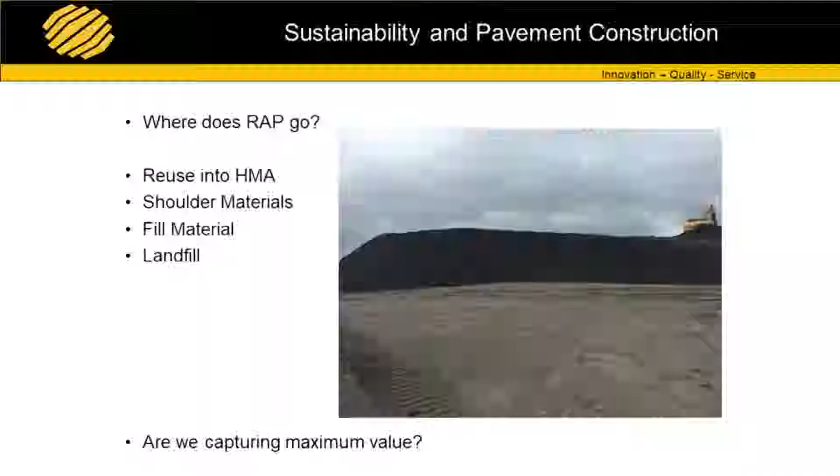Let's talk about RAP. Where does reclaimed asphalt pavement go? I live in Indianapolis, heavily urban area. We have RAP piles all over the place. The RAP pile's so big, they put a little reclaimer on top to help crush them down, and it looks very, very small from the roadway. We reuse it in hot mix asphalt. Tried and true method. We see contractors that use it as shoulder aggregate. Maybe even worse, they use it as fill material. And the last thing we want to do when we talk about retiring RAP, put it in a landfill, right? Because we're just occupying space. Let's talk about, are we capturing the maximum value of that material?

So I'm going to talk about the cold recycling processes today. There are full depth reclamation, cold in place recycling, and cold central plant recycling. My colleagues from ARRA are going to be talking about the 4th recycling technology after me, which is hot in place recycling. But at the end of the day, I want us to keep in mind with these technologies, we're building roadways, we're using less resources with proven construction methods. These are engineering processes, engineered equipment, engineered designs with engineered technology.

And ultimately, and this is a clip from Road Resource, which Rex is going to talk about later, as pavement managers and pavement designers, we want to increase that overall network condition, right? We want to keep those PSI values high, PCI values high. And we want to do it for the lowest cost, keeping a green aspect in mind, the eco-benefit, if you will.

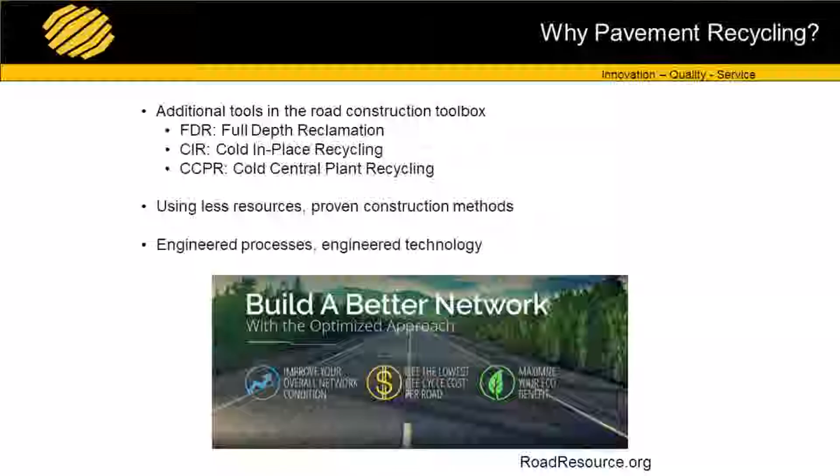So here's a little snapshot of what the 3 processes are, and really quick, do our agencies have any experience with full depth reclamation in here? A couple hands up. So it's the deepest treatment. We're going to get through all the asphalt pavement. We're going to incorporate some of the aggregate base or subgrade depending on the needs of the road. We're going to use a bituminous stabilizer, a foamed, or an asphalt emulsion, or if we're getting a lot of subgrade in that mix, we're going to use a Portland cement stabilizer.

So FDR, if you want to picture where would I use this tool, this is an alternate to complete reconstruction, remove and replace. This is where we can grind the roadway back to an aggregate granular layer, and we're going to stabilize that for a homogeneous base.

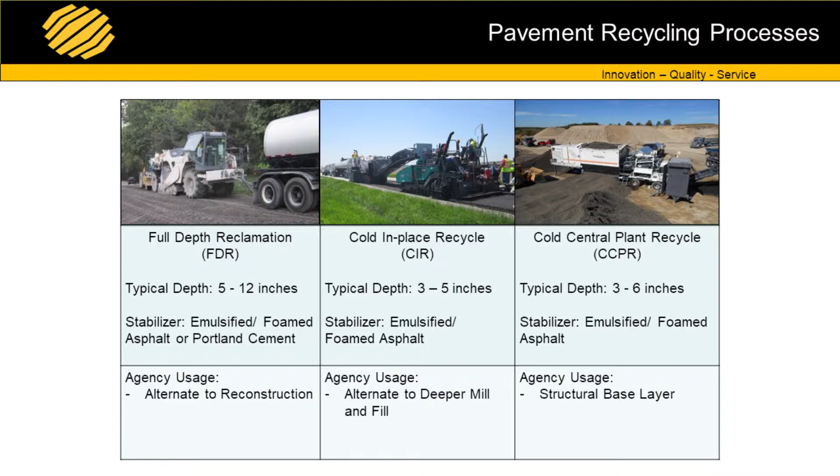Cold in place recycle is the 2nd treatment. Typically, we're looking at 3 to 5 inches in processing depth. That milling machine goes down the road, just like a regular milling machine. But instead of putting it in a truck and hauling away, we're going to add a stabilizer in-house, and we're going to throw it right back in a paver and lay it in place.

So an agency might use CIR as an alternate to a deeper mill and fill type treatment, where you have to get into the pavement a little bit deeper. Cold central plant recycling is where we're taking that RAP to a nearby location, close to the job site. We're going to put it through a pug mill. We're going to add a stabilizer to it, truck it back, and we're going to use that as a structural base layer. So those are the three cold recycling technologies where we can reuse the existing pavement, we can reuse existing RAP, and build very good performing pavements.

Just in general, keys for successful recycle projects, it comes back to right road, right time, right treatment. And a lot of it's with process selection, and we could stand up here all day and talk about process selection. It is an engineered process, so to ensure good projects, you've got to understand the scoping up front, identify the distresses, where they're coming from. You've got to do proper pavement design, understand your stabilizers and mix designs, and perform quality control.

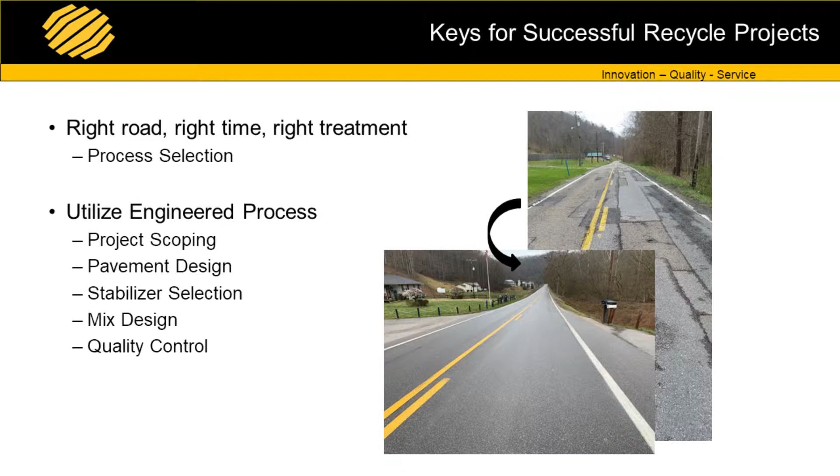So you can take a road like that, perform a CIR, cap it with an HMA overlay, and get performance that looks like that after years. So let's just keep that in mind as you design these projects and build these types of projects, that there's a lot of work that goes up front, before scoping, during construction, and afterwards to make sure that they perform well. So here's a little schematic just to keep in mind what the CIR process does.

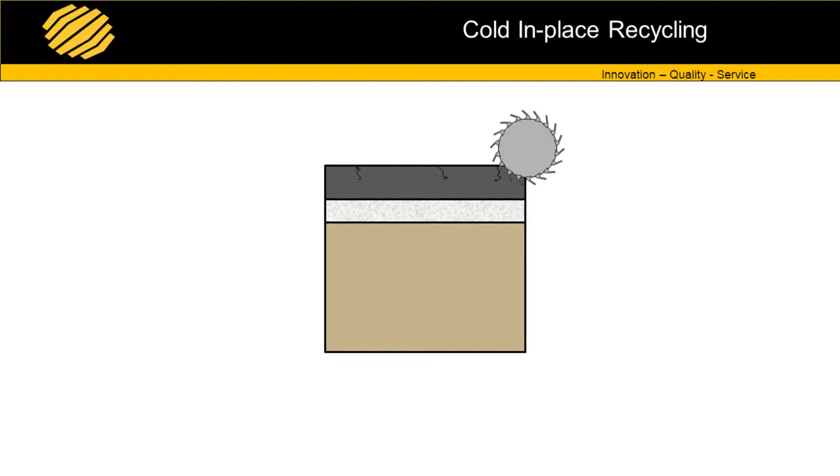So let's say that we have cracking in the top 3 to 5 inches. That milling machine's gonna go through, grind it up, lay it back in place. We can lay it back in place on existing HMA where we don't have any bottom-up cracking, where it still has some remaining life in the bottom layers of that pavement. So we're gonna address a lot of the top-down issues. Depending on the pavement, we can go all the way to the aggregate base if we need to.

So here's a little video of what the CIR operation looks like. This is a project in southeast Michigan that I had the opportunity to be a part of. So this is what the train looks like. First up, we have a water tanker. It's plumbed to the machine. We're gonna add a little bit of water into the cold recycling process to help with the mixing of the emulsion and the RAP. It's gonna push an emulsion tanker. That emulsion tanker is delivering about 2.5% emulsion to the RAP during the process.

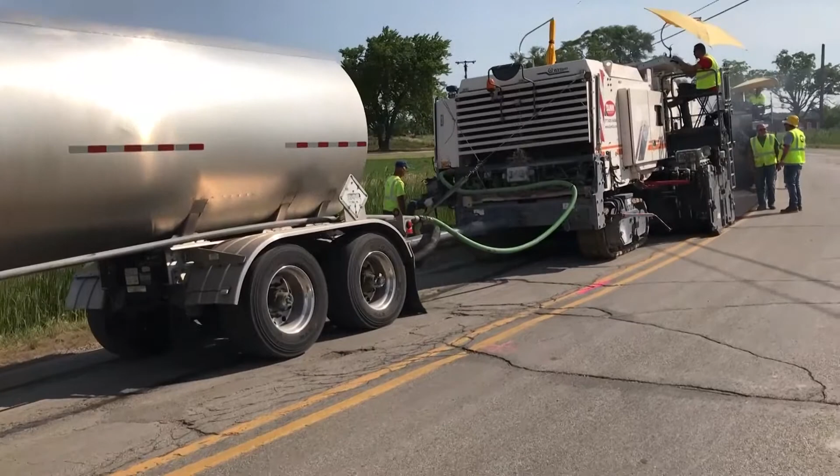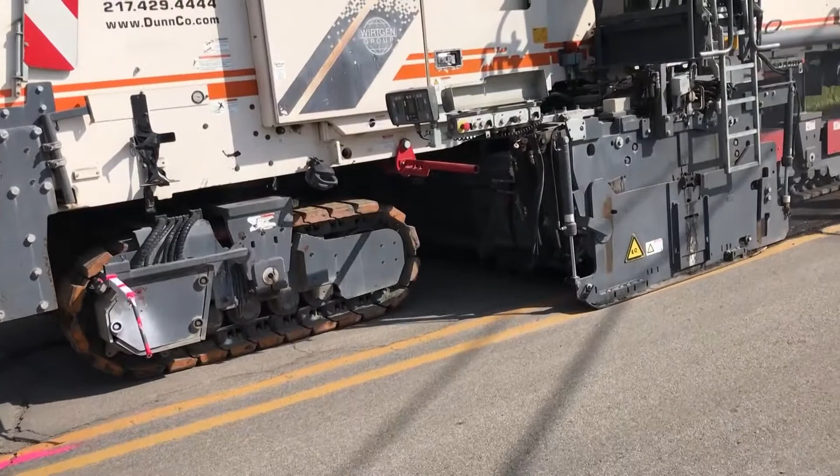And it all goes into that machine, which is engineered to control the rate of both the water and the stabilizer that goes into the RAP based on the speed and the cut depth of that material. You can kind of see the pavement here, kind of the cracks that we have. This is a composite type pavement. The machine cuts 12.5 foot wide, so it cuts a full lane width. Kind of see that milling machine's going down and grabbing all that asphalt. We're gonna take all that asphalt, we're gonna eliminate those cracks. We're almost down all the way to the bare concrete.

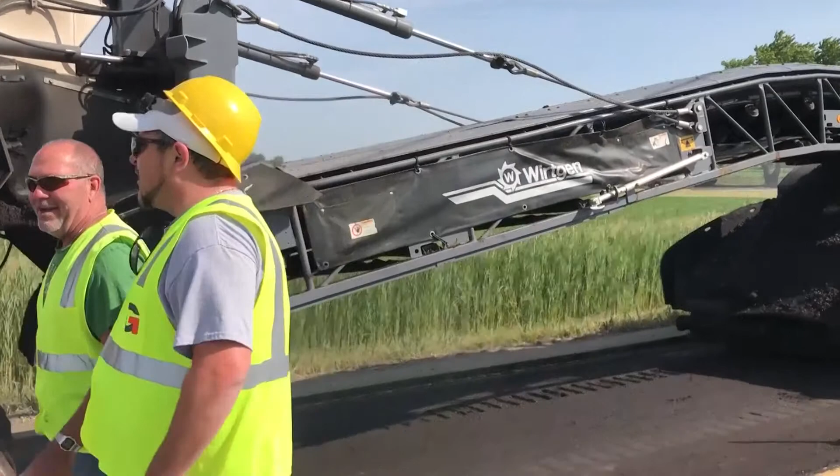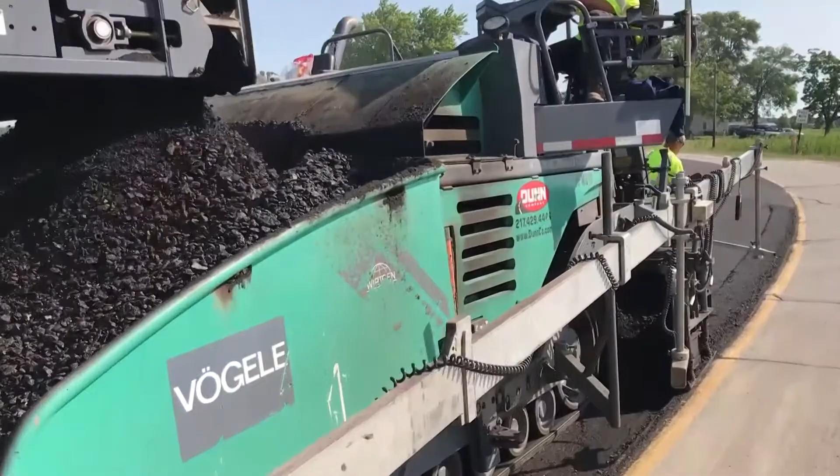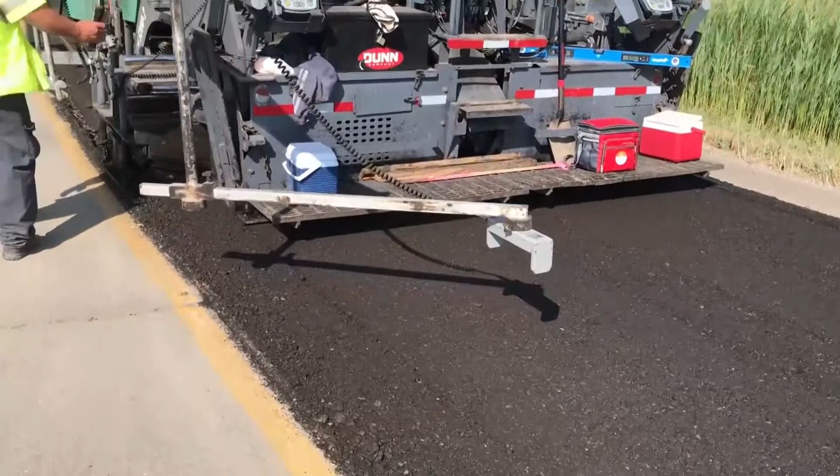That RAP then goes straight into the hopper of the paver and then gets laid right back in place. Relatively homogeneous mixture coming out, and then it's going to get compacted down the roadway. You can kind of see a little bit of what that looks like as it gets seated. So after it gets compacted, we're going to leave that CIR open to traffic because it has enough strength to put traffic on it. We're going to let it breathe and we're going to let it cure out a little bit. We're going to let some of that moisture get out, and then we're going to cap it with some sort of surfacing layer.

What don't you see in this process? Well, the milling machine's a little bit of special equipment. You don't see heat, so there's less energy. You don't see trucks. So the other alternative to fix that roadway would be to mill those 4.5 inches of asphalt up, load it in a truck, take it off to the nearest site, bring back brand new asphalt, right? So there's that green benefit of the trucking, right? Because they consume fuel. They release gases in the environment as they work. But let's just think from a safety standpoint, too. There's a lot less truck traffic in and around that roadway for the other traveling public. So let's keep that in mind, too, when we're talking about sustainability of some of these recycling type treatments.

Let's talk a little bit about how they perform. And I'm going to talk about a project that we had the opportunity to be a part of here in West Virginia. This was a CIR project constructed in 2015. And I think a lot of folks have this idea where a lot of these recycle type treatments, they're only good for lower volume roadways, low speed roadways, right? We got to understand these treatments so that they get applied to low volume roadways, but we got to also apply them to some of these high volume roadways, high speed roadways.

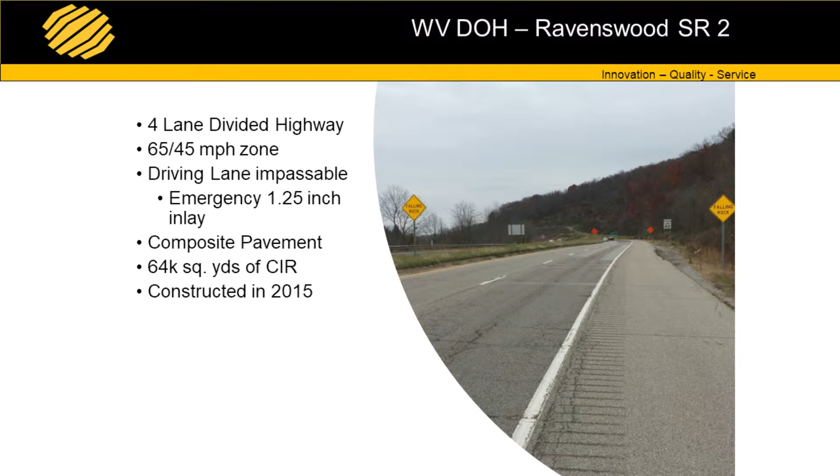And this stretch of State Route 2 near Ravenswood, this is a 4-lane divided highway. There's a lot of trucks, there's a lot of traffic, there's a lot of speed. The pavement, even before the project started, was in such dire condition that there was actually an emergency inlay before the project even started on that driving lane. It was a composite pavement, so there's some concrete laying underneath all that asphalt. Ultimately, it was a 64,000 square yard CIR project. And again, as I mentioned, it was built in 2015.

So let's take a look at what that pavement looked like. What do you guys see here? A lot of cracks, right? From what? Composite pavements crack funny because the joints reflect through, and a lot of times as those come up through, the other parts tend to crack around with it. Travis, you mentioned some environmental cracking. What do you think that ride's like for our traveling public? You're bouncing up and down. Travis, that data before the CIR was about an IRI of 140, 150, in that range. So that's what that pavement kind of rode like for our public, our social impact, if you will.

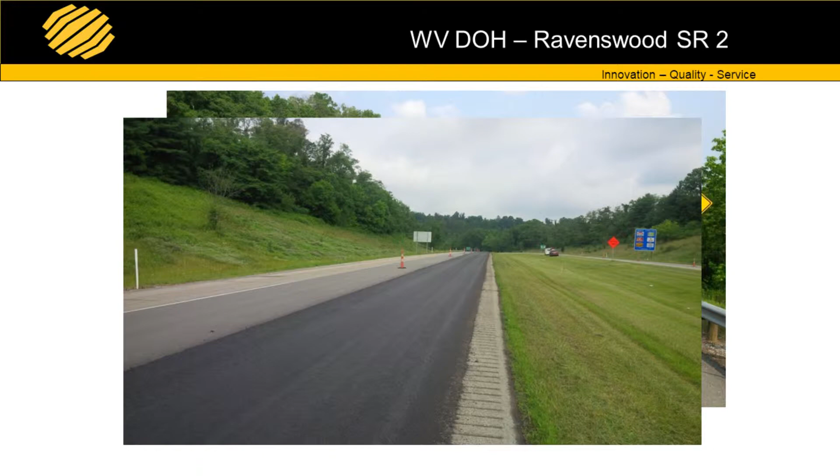So here's some shots of the construction. This was an emulsion project, and on this one, we actually added a percent of cement in the formulation to help set it up. We were cognizant of the fact that we were going to have some traffic on it early, particularly in some of these intersections. When we're done compacting these mixtures, we like to put traffic on them. Well, what happens when it's slow-moving, turning truck traffic? What do those wheels like to do to mix, right? Think of the forces. It's a shear force, right? And if that mix isn't set up, and if it's not hard enough, and it doesn't have cohesive strength, what are we going to expect that mix to do? It's going to tear and shove and push and scoot all over the place, right?

Well, after a few rotations of trucks going through, you can kind of see the tire marks, and you can kind of see where maybe it's picking up the loose ends of that mix next to that adjacent lane. But ultimately, you can see that mix didn't shove, push, tear, or anything like that. So as agencies try to understand and use these new technologies, you got to be cognizant of how do I optimize the performance of that mix to get the expectations that I want during construction, understanding that we're going to expect to have traffic on it relatively quick. So, performance.

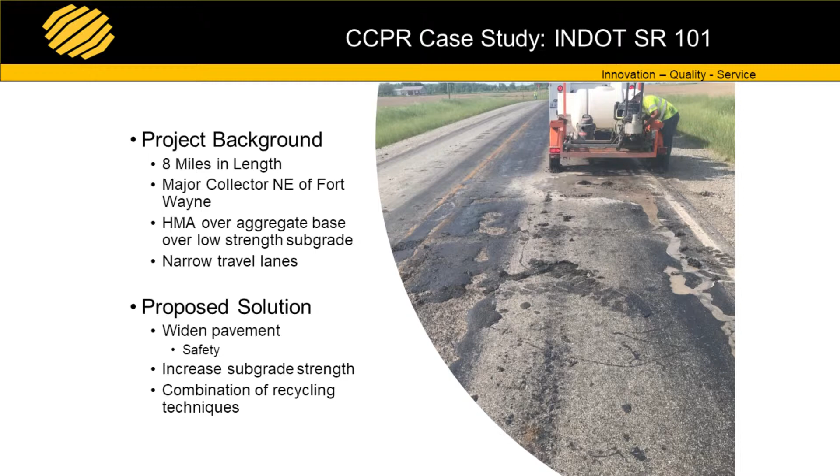So the idea was, how do we widen this pavement to enhance safety? We need to increase the subgrade strength so we have a good solid foundation. They ended up employing a combination of recycling techniques. So here's a shot of the roadway. They had asphalt 20 feet in width. And what they elected to do, and this was the first time they tried these processes together, they took 8 inches of that existing asphalt off the top.

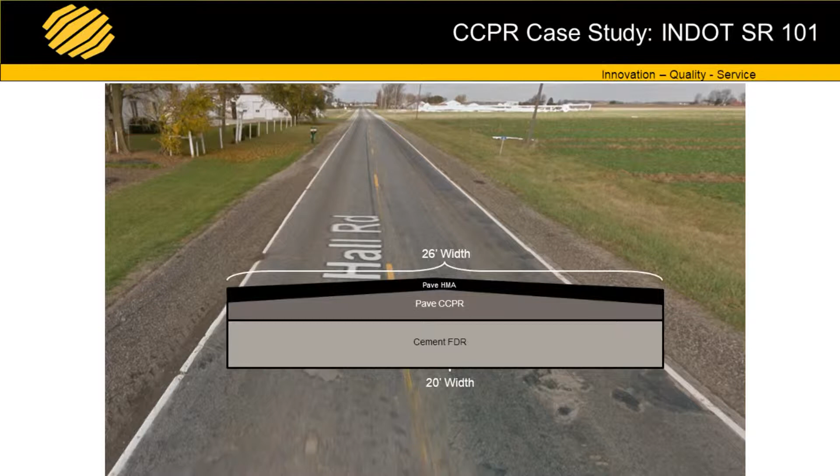They took the remaining aggregate base, subgrade, and shoulder material, and performed a 26-foot wide cement FDR. So they're going to build that foundation. They took that stockpile that was only 10 miles down the road, instead of 25 miles to the nearest hot mix plant, and they paved it back in a single 6-inch lift as a cold central plant layer, and then they capped it off with 2 inches of hot mix asphalt.

The general contractor on the project was Brooks Construction, and Brooks put together a really nice video that's available on YouTube. So I wanted to share that with everyone here today, because it really helps demonstrate how the process works. So there's an idea of what the roadway was like. A lot of truck traffic, pretty narrow lanes.

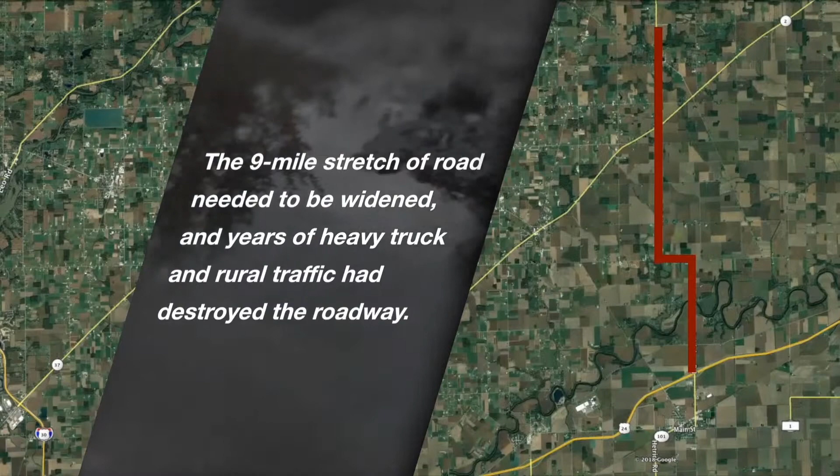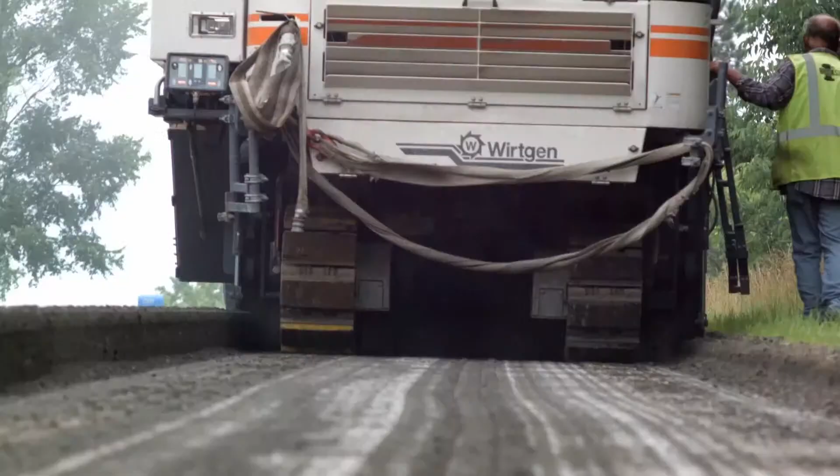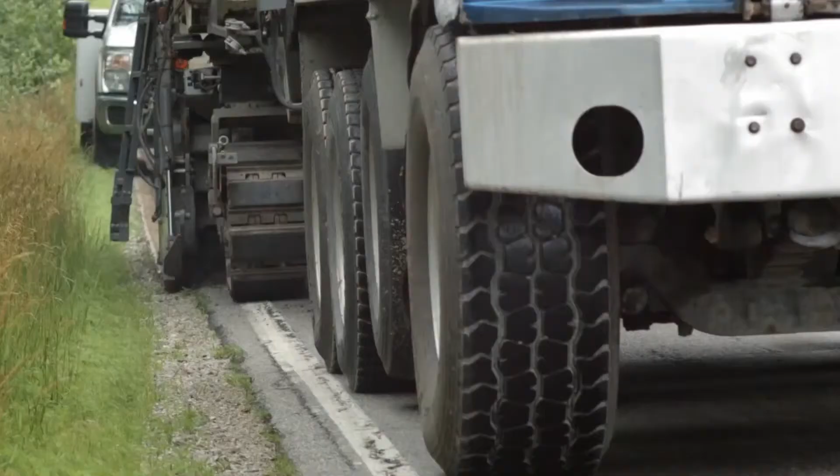And they ask the question, as they start showing the milling, how many tons of RAP do we take off the pavement each year? And what do we do with it? And I would have to say that Brooks, who's a pretty heavy hot mix contractor in that area, was great to work with in understanding this new process. As I said, this was INDOT's first CCPR job, and they picked a 9-mile stretch to do it, so it was quite the demo type job.

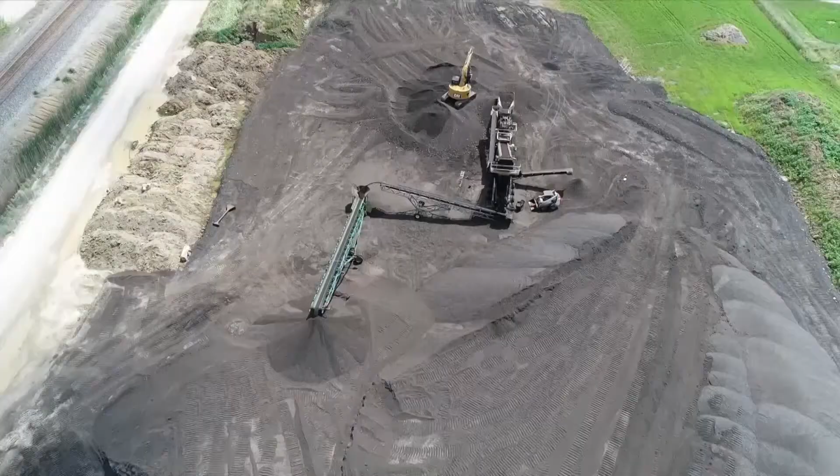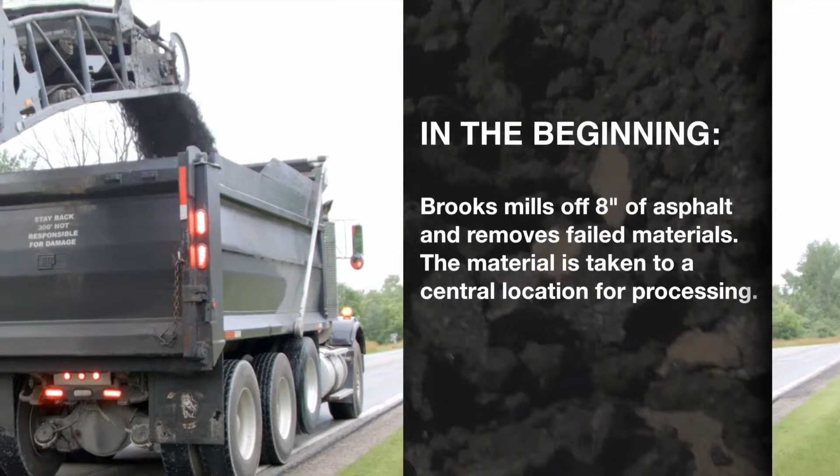That's what 9 miles of RAP looks like in a nearby location. So they take the 8 inches of asphalt off, take it back to the plant, and do what we call processing. Processing entails crushing and screening that RAP down to 1.5 inches, 1.25 inches minus, so that we get continuously graded material.

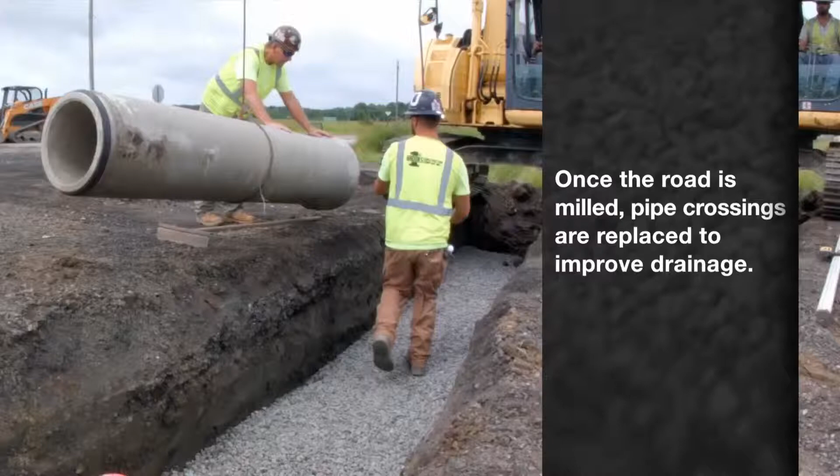They were able to do some pipe work, some pipe crossings to enhance drainage, and they were able to build that platform for the cement type FDR. So we're going to create that stable platform to put our flexible pavement on top of.

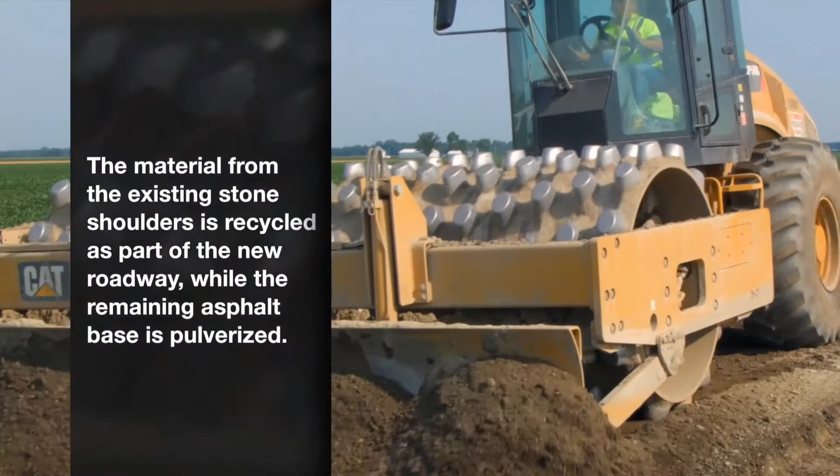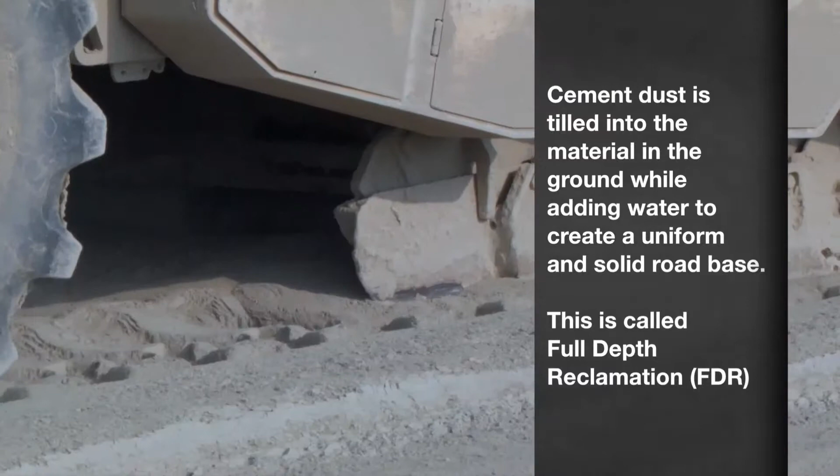So how much material did they import to do that foundation stabilization? They just brought in the cement, right? So 5% of that 10 inches was new material brought in.

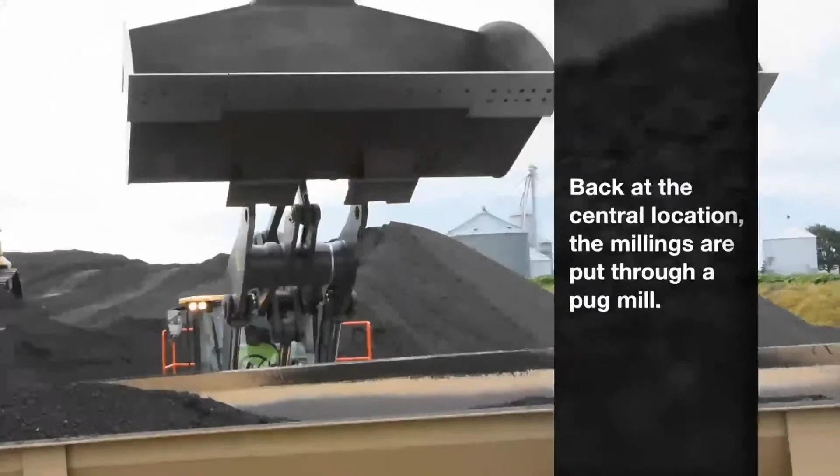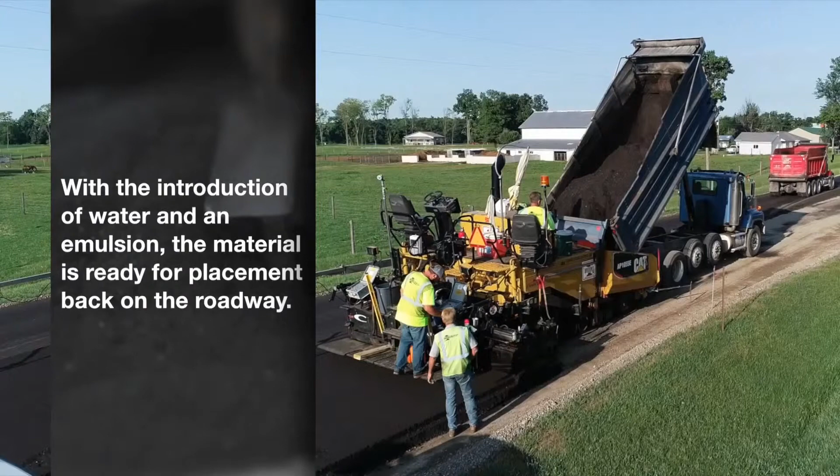Here's a shot of the pug mill, what it looks like. That pug mill was making 300 tons per hour. And across 17 days, that little pug mill made 37,000 tons of mix and supplied it to this job. And I mentioned that pug mill was only 10 miles from the job versus the 25 miles compared to the nearest hot mix plant.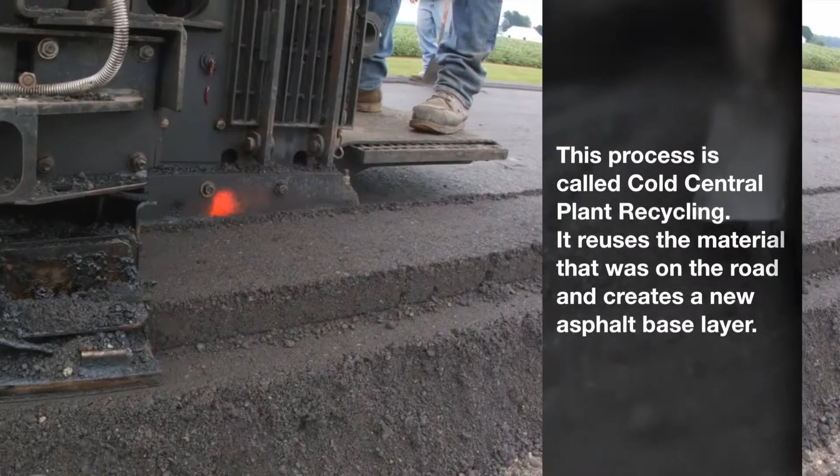You know, how many trucks do we have for 37,000 tons of mix? It's a lot of truckloads, right? Multiply that by 15 miles back and forth. Saved a lot of money on trucking as well.

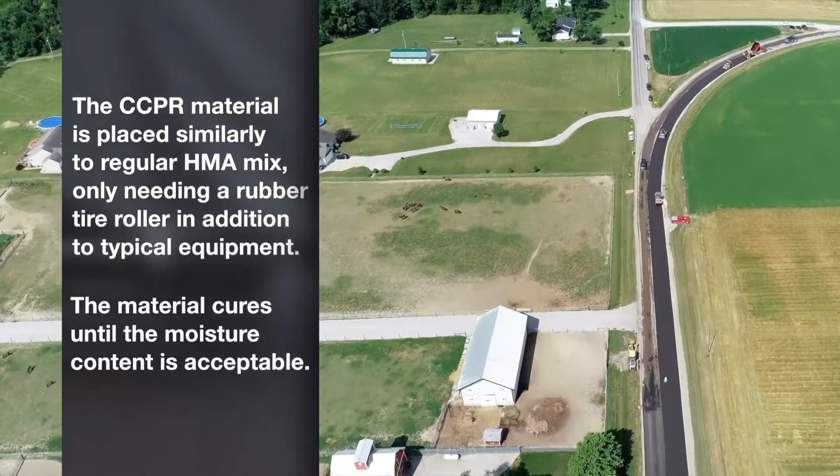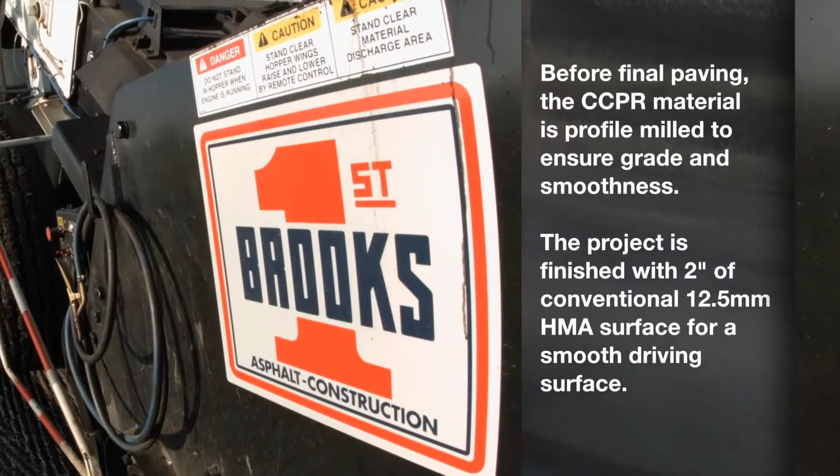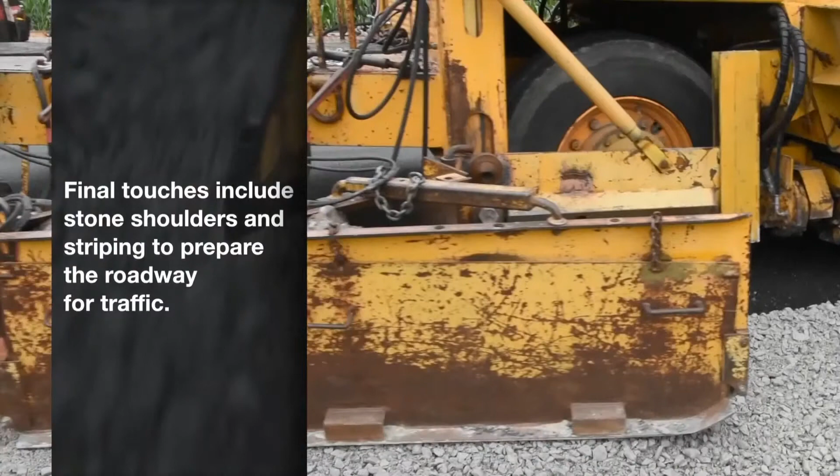Went ahead and put a 2-inch asphalt layer on top of it. We actually profile milled the central plant afterwards to help with ride and cross slope, which is one thing that we're doing in Indiana with our recycles to help with ride, and it also helps with bonding. Those striations from the milling help create a little bit better of a shear plane for the surface and the underlying layer. And ultimately, brand new roadway.

Let's do some math. Talk about sustainability, talk about reuse. 10 inches of that base subgrade, 95% of that was already there. We brought in 5% of the cement. The cold central plant mix, 6 inches thick, approximately 37,000 tons. We used 2.5% emulsion. Cold treatment, we didn't even have to heat it up. We didn't have to use as much energy during production. So that layer was 97.5% recycled materials.

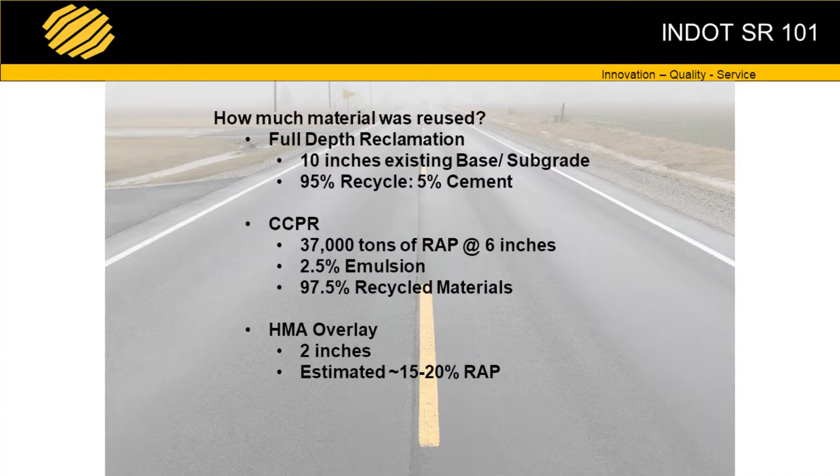Then if we consider the HMA overlay at 2 inches, which I would assume probably had 15 to 20% RAP in it, that pavement rebuilt 18 inches thick definitely had over 90% recycled material in it. So the question is, well, what did it cost? And some of the statistics I've heard is that central plant layer is probably 30% more cost effective than traditional methods. So across 9 miles, 37,000 tons, the department saved a good amount of money on that project.

So there's a lot of other resources and tools out there to gain a lot more information about how these things work. Project 9-62, NCHRP project that VTRC is working on with others, they're helping find new quality control methods so that we're actually improving the engineering process of how these are constructed in the field. I know NCAT has test sections out on US 280, looking at central plant, CIR type layers and how they're performing over time.

Where's our Virginia guy? Everybody's watching you guys too. You guys are doing interesting things there. So the same thing we did on 101 with a cement FDR and a cold central plant layer, our friends in Virginia are doing the same thing on interstates, on added travel lanes. Everybody's interested to see how those projects come together. The data that Brian Diefendorfer is sharing on the first job is showing that these layers are performing extremely well.

So other tools that exist, roadresource.org. Rec's going to talk about it a little bit later. It's a great website, talks about the recycle treatments, talks about all the preservation type treatments. Helps give you more information on how they work, how they're put together, which candidates are good for which treatments.

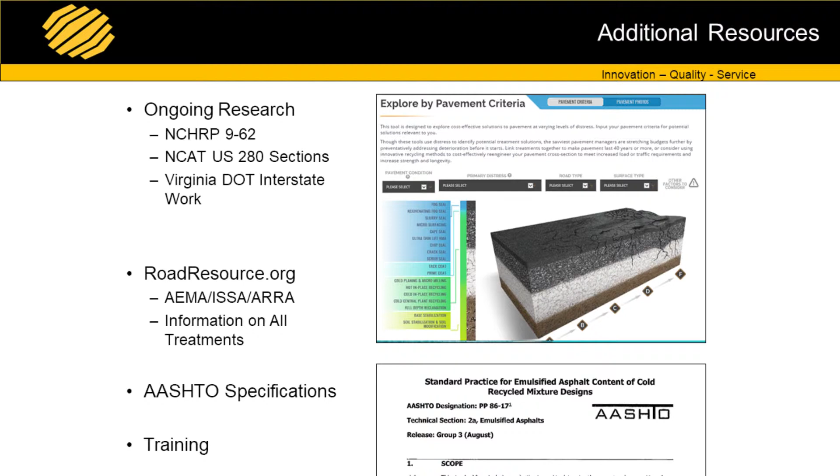We have AASHTO specifications out and available as a resource for states that want to develop their own spec or adjust their current spec. And there's a lot of training available too. NHI courses, the cold in place recycle NHI course is really good. So those resources are available and out there to understand how these things work, how they perform, and how they can save money and give agencies an eco option for restoring pavements.

So ultimately, goes back to right road, right time, right treatment. Goes back to process selection. Engineered process, that's how we're going to get good performance out of these. That's how we're going to get that social impact. Make sure that we're using a treatment that provides good performance in the field for our driving public.

There are cost savings realized by agencies using these tools. It varies by geography, but they're typically less cost than some of the traditional methods available. And there's significantly less impact on the resources out there. Think about the reuse option. We're gonna recycle that material in place. We're gonna reduce trucking. So we're gonna create a little more sustainable pavement than what we would if we were ripping everything out and bringing back in new material.

Are there any questions?

The way the contract was written, or the way that the job was described, the milling was a separate operation. Pay item, remove the RAP. And they specified they want 6 inches placed back down. So it made sense for the contractor. The contractor could have taken the RAP off and gone anywhere and brought back a new central plant type material.